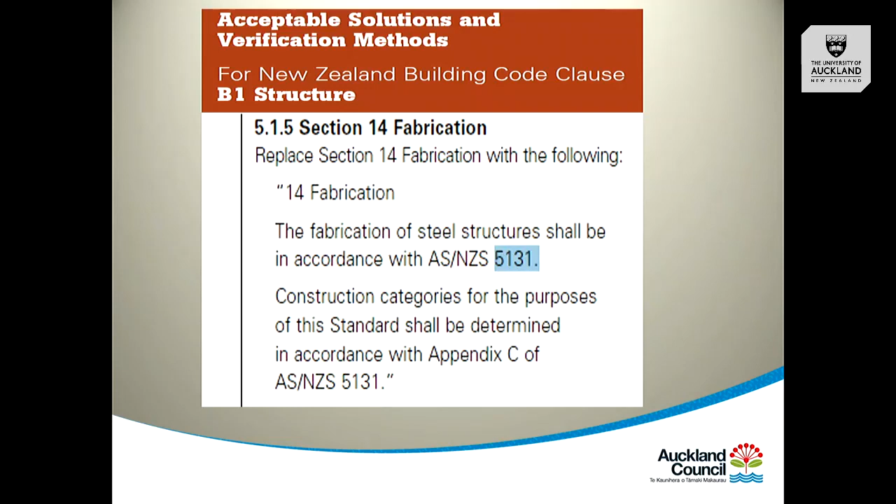So what I thought we'd do now is look at and see where it's applicable. So it's a fact that it's applicable. There's absolutely no question. It's cited in the B1 code, section 5.1.5, section 14. You've got to comply with it. So what has to comply with it? Well, I think what's interesting here is that the standard applies to all types of building, and it applies to even a lintel used in a private house. So if you've got a fabricated lintel holding up a garage, 5131 is applicable. Yep, no question at all.

We've been having some debate with people like Kiwi Span, New Zealand sheds, those type of buildings where they've got cold formed purlins and girts and trusses and so on. That's a little bit of a grey area. So we did some work with AS/NZS standards, with SCNZ, with HERA, with Steel Australia, and we did some work with the manufacturers. And we all came to the same conclusion, that if cold formed purlins and girt members and decking are designed using AS/NZS 4600, then it's applicable. So if you're designing a building and it's got cold formed girts or any cold formed type of structural steel, and you've designed it to 4600, then 5131 is applicable. That's the rule of thumb we're taking at the moment. So no doubt there'll be some questions about that one later on. That seems to be a bit of a difficult one for people to understand, but that's the current approach that Council's taking.

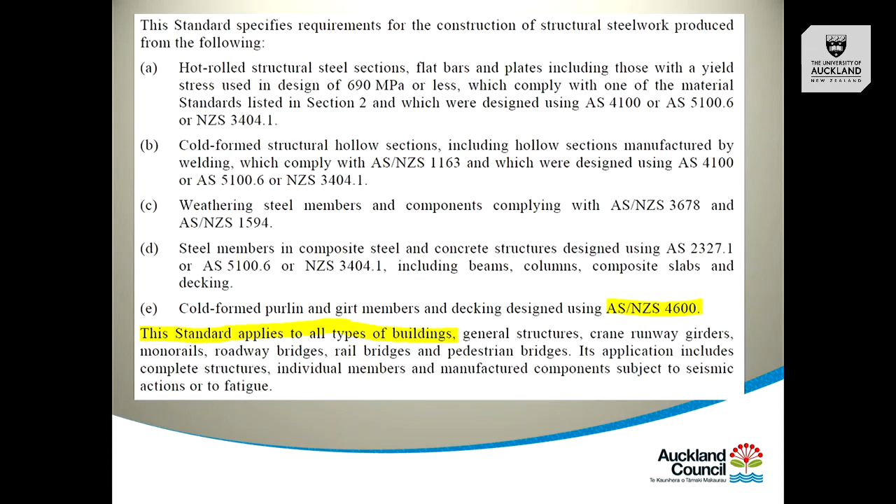Now, you might have noticed that part of the B1 building code, it talks about the construction category. So this is the role of the designers, of the structural engineers. You need to look at 5131, you go to Appendix C, and in there are the instructions on how to determine the construction category. Now, the construction category is not an importance level, it's not construction monitoring, it's a separate ID or an identifier, because it tells us what type of documentation is needed.

So the structural engineer designer does not need to worry about the documentation. You're designers, you're not welders, you're not fabricators, you're not expected to know, right? But you are expected to know that this building was designed for certain earthquake conditions, for certain stresses. This is what you do. You're the ones with all the knowledge around design. So from that, you use that to determine this construction category.

So the three factors you look at are the risk to life and consequence of failure, so that gives you an importance factor. Service category, which reflects the actions to which the structure and its parts are likely to be exposed. And then the fabrication category.

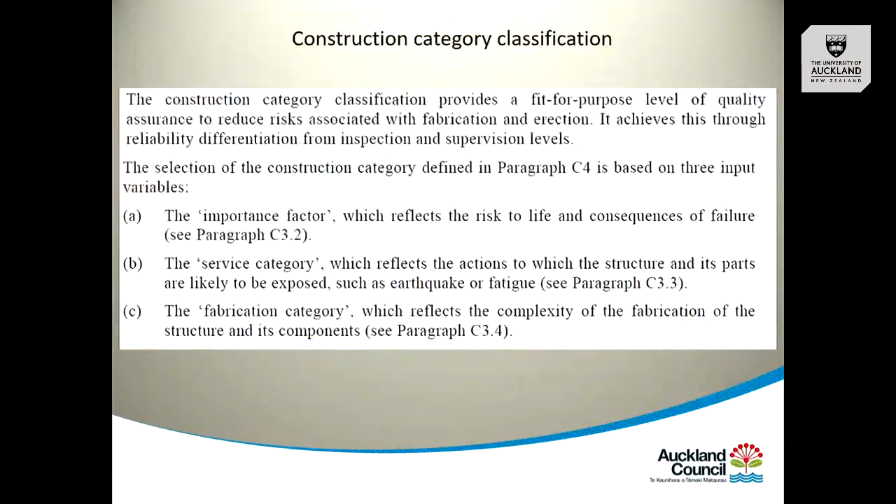If I use an abbreviation that people are not quite sure of, please ask. I've got a terrible habit of doing it. I think everybody understands it, and I do apologise. So QMS, Quality Management System.

So the D1 table tells you what you need. So a construction category 1, which I suggest would be a simple beam used as a lintel in a garage for a residential property, just requires some delivery documents, some dimensional checks, some non-destructive testing for the welding, 3 bits of paper, so it's not complicated.

When you get into the larger complex cruciforms, critical joints, some of the bigger stuff that you would have seen going up in the conference centre, some of the stuff that went up in Commercial Bay, the steelwork that they're using down for the basement of the Seascape Hotel. I don't know if anyone's had a chance to visit that site, but if you can get a chance, it's well worth going there. From an engineering point of view, it's fantastic. The building, the 5-level basement, and they're building it without any rock anchors or D-walls. They're just going using plates and digging down as they go, and then shoring up. It's quite impressive, the steel they got there.

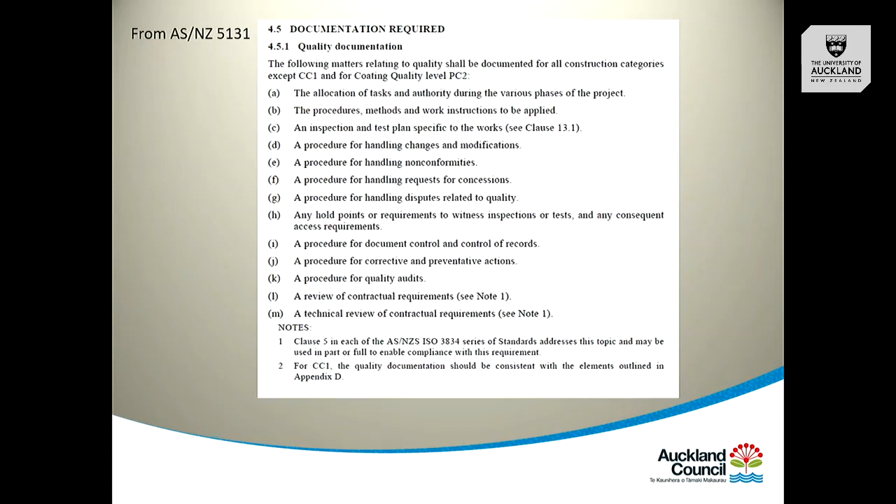So your design's fine because you've specified it, and you've specified 3404. Now the poor constructor can't buy 3404 circular hollow sections. So they've got a massive problem now. Yeah. So what we do then is we go back and work with them at that stage. So here's your consent, get on with the rest of it. But now take us through, as a constructor, your compliance part.

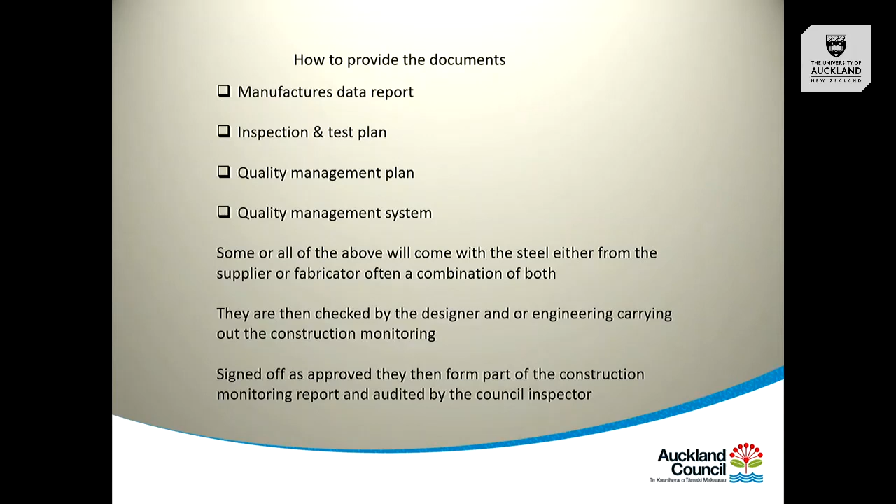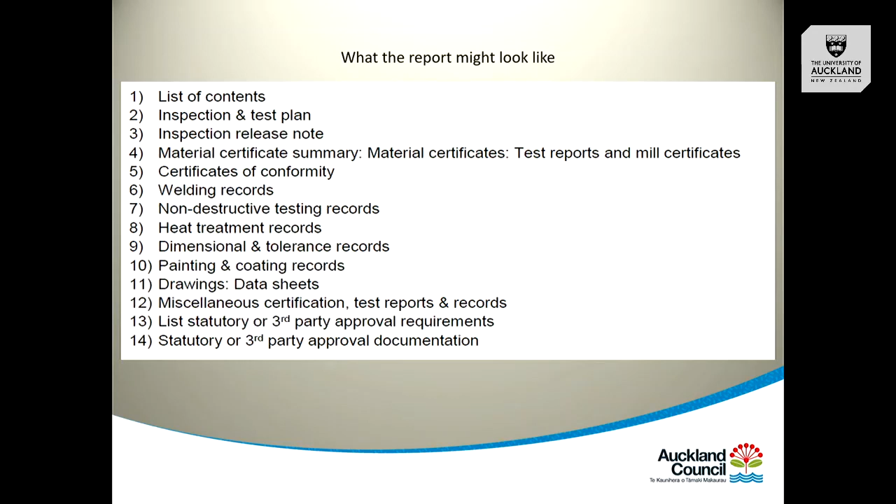So that's what the report might look like, your MDR. So your MDR contains a hell of a lot of material. Again, it will be all or some of this. So again, we'll tick off what we need. You'll see what we need here. So this is what the process looks for, so you understand what the council are looking for. They're not going to check.

Yes, you write PS2. Got any PS2 authors? Okay, cool. So you write your PS2, and you're cool. That's good. But it still goes to our structural engineering team because they'll do some audit. And one of the audits they'll do along with the processor is they'll do a search on your structural steel specification. And they'll search for 5131. Is it in there? Oh yeah, you specified it. Tick that box.

Have you specified the construction category? Tick that box. Have you specified an inspection test plan? Oh yep, you specified it. You're not producing one, you're specifying it as designers. Tick that box. That's it. That's your design approved from the aspects of complying with the requirement to demonstrate compliance to 5131. Just those three simple little actions. Nothing complicated.

Do we just cover that on the specification or should it be covered on the drawings as well? Either or. It depends on the size of the project. Very often if it's in the specification, that's good enough. Sometimes for a smaller building, you just have a set of notes at the start of your structural drawings. Put it in there, as long as it's clear that the constructor has to provide the steel to 5131. So as long as it's in the documentation, either on the drawing or specification, Auckland Council is happy with that? Absolutely, yeah.

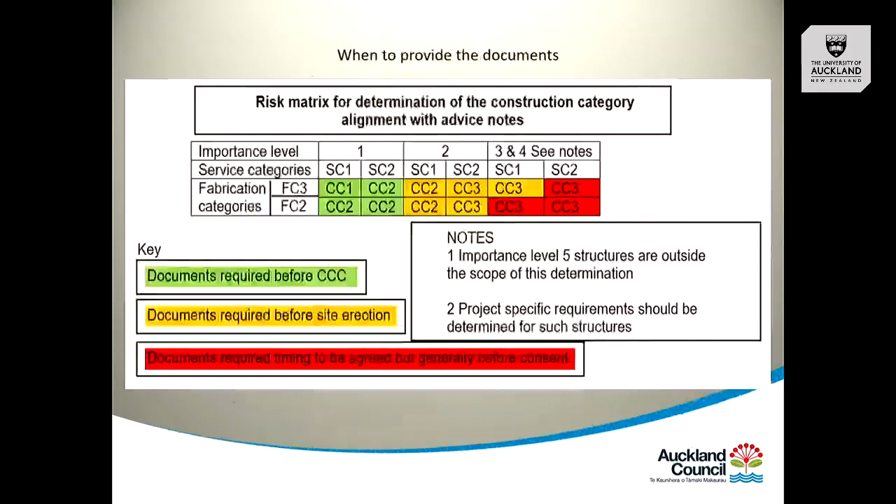Yeah, so it's importance level, service category, fabrication category. So once you've determined those 3, that determines your construction category. That's you done as designers. That's you finished. This gentleman first, yeah? Okay, thank you.

The question is about the construction and fabrication category. If the assumption of the design engineer was that it's CC2 based on the fabrication category, and during the construction they have changed the fabrication category, for example, from shop weld to site welding, whose responsibility is it to raise the question?

Okay, so questions around if the construction category changes? Yeah. So it's whoever owns the consent is responsible for managing change. So that's not just limited to the construction category.

If there's any change on the consented documentation, then that has to be managed by the applicant. So they're responsible. So they come back to council. PS4 author is not responsible for that one? No. What you do is you go. The typical way it would work is that it'd have to be quite a major change in design. So you'd go to the inspector, assuming the work's already started, and you'd say, "Look, we've changed this design so drastically. We think the construction category's moved up."